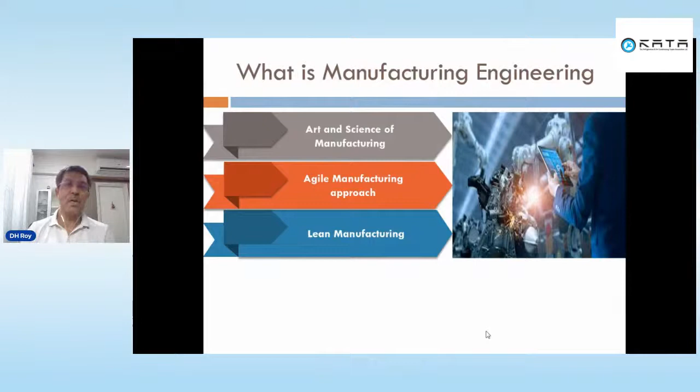And of course, lean manufacturing, as you all know, not only involves the people but also the cost at what you are able to do. Basically, how lean you are able to run a manufacturing organization to ensure cost competitiveness and obviously improve.

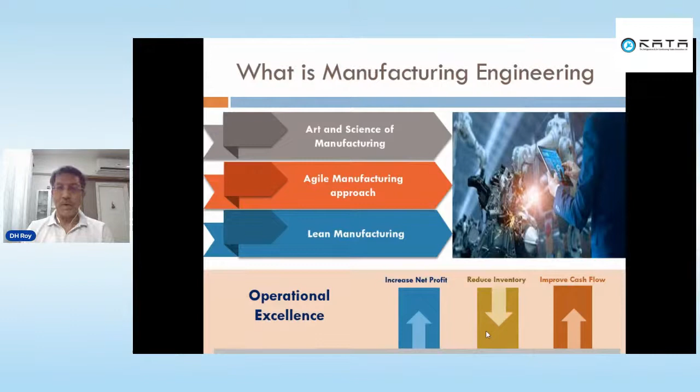So what it brings, basically, is operational excellence. And when I say operational excellence, what does it mean? If you are able to run a well-oiled machine, it increases profit, reduces inventory, and most importantly, it improves cash flow. So if your plant is well oiled and running well, these are the benefits you get. And manufacturing engineering people play a major role in ensuring you have a well run operation.

I mean, to compare, for example, though our national sport is not cricket, a lot of people talk of cricket. Now cricket is more of an individual game. If 2 or 3 people perform on a given day, probably you can win a match. But if you see a soccer or football team, it's a team game. But there's a difference between that team and what I'm talking about in manufacturing, for a simple reason that in football, though it's a team game, each individual has got a skill within himself.

And there's a single coach you have. So the person playing at the back has got certain skill, the person playing in the forward position has got certain skill, and there's a coach who takes care of it. More closer to manufacturing is what you see in the Kerala boat race. Typically they have this boat race during certain months of the period, where you'll find there'll be some 20 odd people. The boat size is something around 120 feet, with some 20-30 people rowing the boat, and there are 4 or 5 people guiding them. And it is not a one day affair.

What happens is they coach the people, they train the people, they know whose strength is there and how he will row the boat, whether he should have a longer shovel or a shorter shovel.

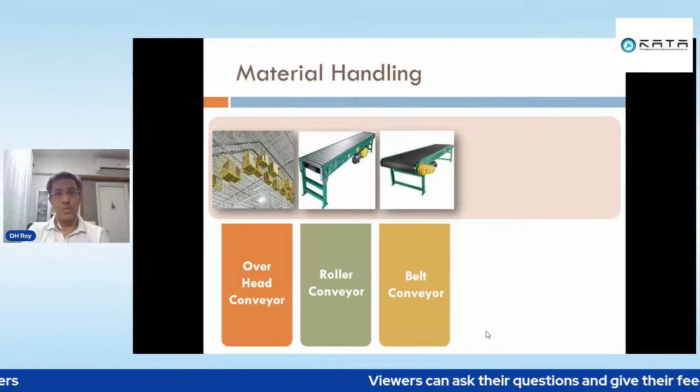So these are various types. One is overhead, where you can transfer lighter material across one end to the other, and wherever required you can take down the conveyor and take it up. Then you have the roller conveyor - it can be powered as well as gravity flow, depending again on what kind of product or component and what is the distance between the two points, you decide the roller conveyor.

Belt conveyor is generally used for light product or components, or where there are chances of damage or scratches - again you use a belt conveyor. Of course, I'm not talking about the conveyor line for making the product, but these are conveyors more for material handling. So again, the manufacturing engineering team decides what kind of conveyor you should have.

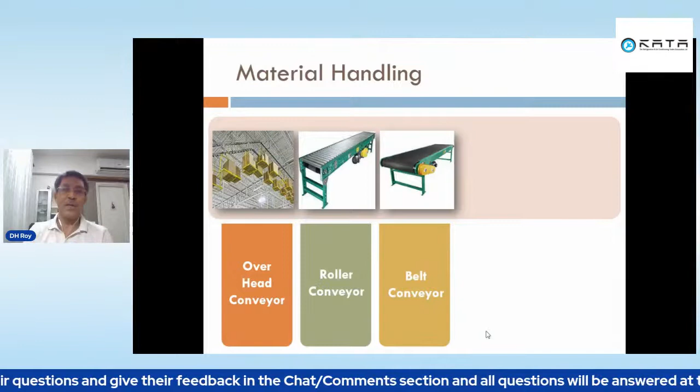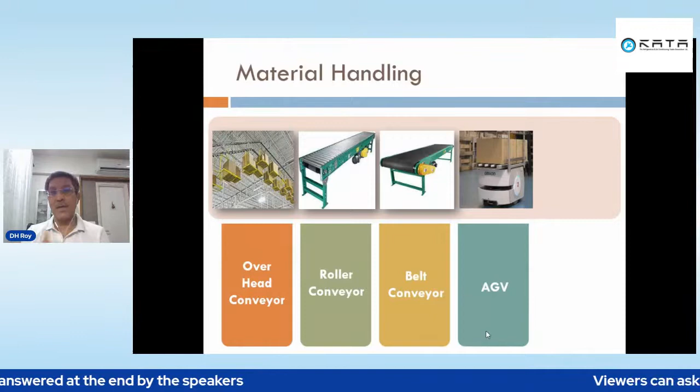Some places probably you can go for AGV, auto guided vehicle, where it is programmed and then automatically at a predefined interval, it's a kind of robo vehicle which carries your material and transfers it to the desired place where the next operation has to be done. So depending on what kind of volumes and product you have, you can use any combination of this material handling equipment, with the eye to improve output, improve throughput, and find the option which is more competitive.

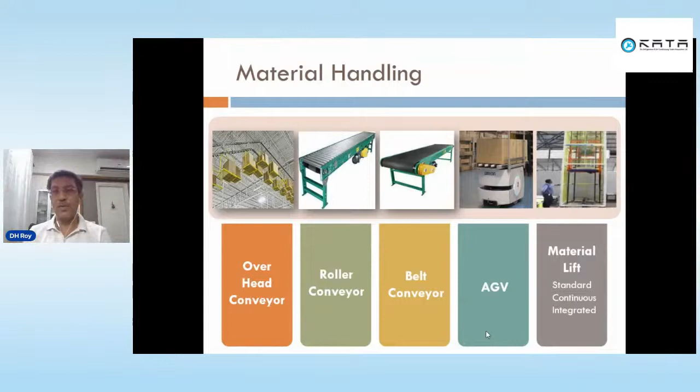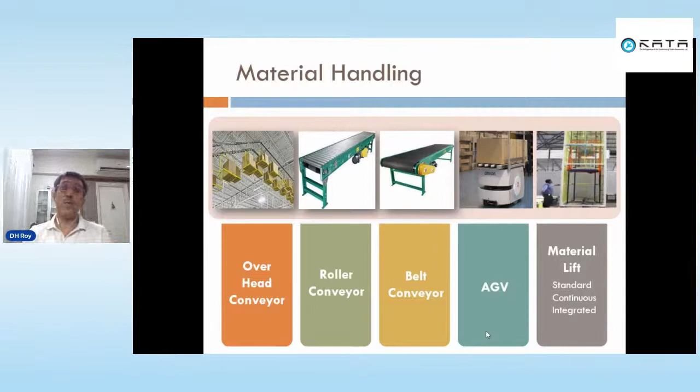So for material lift, if you are working on 2 floors, what kind of lift should you have? Should you have a standard lift, or a continuous lift where it goes up and comes down continuously, like a collapsible type lift, or do you need to integrate it so that after going up it moves to the designated point? So depending on your layout, your product, and the component you make, manufacturing engineering decides what kind of material handling equipment one should have.

This is again very important - continuous improvement. Whatever I said about it has to be continuously worked on. You should not think that once ME's work is done and set, and the design is complete, the job is finished. It's not necessary that that's the optimum solution. It is important to have continuous improvement, so the team keeps working on it.

One is, of course, the technology that is coming. Secondly, can we reduce some processes? First the process gets defined, because they take the design and drawing and set the processes. Over a period of time, they realize that probably certain processes are unnecessary - you don't need to have that process. So whether I can reduce the process - one is quality improvement, the other is reducing the number of processes, by which automatically your cost of manufacturing will come down.

Gemba Kaizen - if someone is struggling, they will go to the site and the place where the operator is working, to see why he's struggling. Though we have given an instruction, sometimes what happens is you overlook something while making the instruction or SOP, and when you actually start working on it, you realize something more has to be done, then only it will happen. Or he's already doing it, but there is scope of improvement because you got a Kaizen suggestion from someone, and then you decide how to apply it. So Gemba Kaizen is basically a Kaizen study at the site, any improvement process.

Mistake proofing - if you find there's a possibility that the operator can make a mistake in the process, what kind of jigs and fixtures should be designed so that he doesn't make any mistake while processing that product, component, or doing that assembly? Because obviously if you make a mistake, either you reject it or you rework it. So how to make it right the first time? They will design a fixture and jig so that you do not lose your productivity, do not scrap any component, or have to reject any piece.

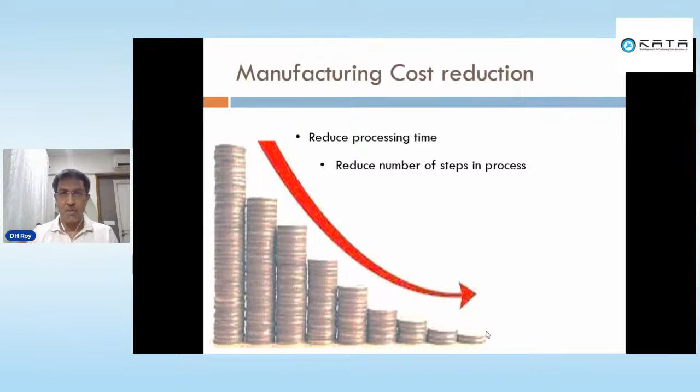As I explained, if you are doing a current product on, say, 5 steps or 5 different processes, can it be done in four steps? Certain process probably may not be really necessary, or whether I can improve upon it, which will again reduce your manufacturing cost.

Reduce rejection and scrap. If your process is well defined and well controlled, it will definitely reduce your rejection and scrap.

And more important, the changeover setup reduction. As I explained, they will work to have flexibility. How can I keep my machine running?

Because you cannot have a long production run, because if you take a long production run, you will end up having inventory. So it's better to have a short production run. But when you have a short production run, what happens? A lot of time goes in setting up for the new product or new component.

How can I reduce the changeover time, so that in 1 minute - sometimes 1 minute may not be possible - but the idea is how I can make the setup change in the shortest possible time, so that my machine uptime is more and I can run a shorter production run.

And of course, reduce WIP. If you are able to run a shorter production run, then you are able to reduce WIP, because you produce and then move to the next station. So between the 2 machines or 2 stations, there is no inventory.

It is a continuous process, and you are able to change the batch size according to the customer requirement, by which you can reduce your WIP.

Reduce the lead time. How does it reduce the lead time? Because if you have got 4 customers, that means you have to make 4 different varieties.

But if you take a long run, obviously the 3rd or 4th customer has to wait till your production run has not got over. But if you are able to reduce the production run, you will be able to satisfy more customers, and can reduce the lead time of delivery of that product or component.

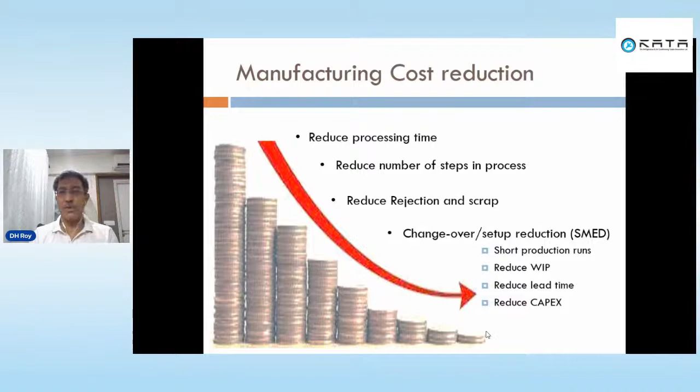And obviously it will reduce the capex, because if you are able to implement all those things - productivity improvement and throughput improvement - probably you can still achieve a higher bottom line by having the same set of machines, or by having a lower capex.

Other thing people do, if you have a more complex factory or more complex manufacturing, there are various ways by which you can monitor. Because one is, okay, what is happening, but how on a real-time basis, how to ensure that you are in control of what you are planning to do.

So there are Andon systems where visibility is provided - if a certain area gets stuck or certain support is required, people can get into it and help the operator ensure that the line is running or machines are running, or where suddenly the rejections have increased, then immediate support can go.

We need not wait for the end of the day, when the report comes next day, and then realize that so much loss has happened, and then we take action.

So now you can definitely have this electronic system by which you can have what you call 4.0, like Andon system. You can have human machine interface, and of course you can have the process sheet also displayed.

So what happens, if a particular location or station requires an operator to do 5-6 components, it's very difficult to put 5-6 process sheets. So you have a digital process, and he selects the screen or process which he is going to work on.

So it will store all the processes, and he can download and ensure that whatever he understands goes through the SOP, and ensure that he produces the component as designed by the manufacturing engineering people.

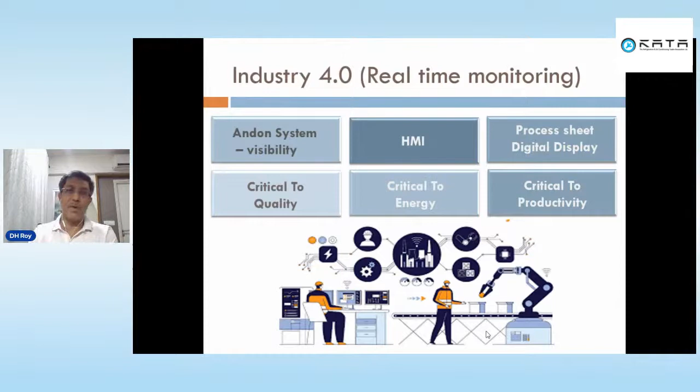This would be required more if you have a more complex process, and if you want to monitor from a remote area, then you can have this setup. A bit expensive, but definitely there's a payback for having this kind of facility.

This is just a depiction of it, basically what kind of Andon system you have. You can have the signaling system where red means there's some problem, orange means they assume there's some problem, otherwise green means it is running properly.

You can have a big board on the shop floor where on a real-time basis you know which station is producing what, whether they are producing as per the targeted plan or not. So these are the indications: if it is as per plan, it will be green; if it is slightly behind, it will be red. So you have all sorts of systems in Industry 4.0.

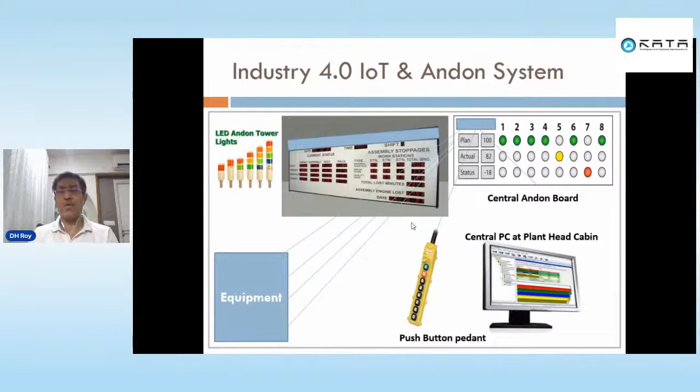But of course, these are advanced systems. If you feel that you have enough scope for this kind of thing, if your operation is more complex, you can definitely have this kind of system. I'm not getting into detail because of the limitations that we have.

Whatever I explained, there is a methodical way of going towards it. There are different phases of how you go about mapping all the processes, and not only the processes, the whole factory - what kind of capex is required, what kind of layout it should be, what kind of equipments are required, where they should be placed, what is the sequence of process, training of the operator, training of the engineers. Everything is taken care of by the manufacturing engineering department.

So phase 1 is basically manufacturing strategy. We should be clear about what we will make in-house, what we will buy from outside. According to that, what kind of equipment is required, what kind of tool fixture, what kind of machines would be required.

Phase 2 is designing of manufacturing and assembly - how the thing would be designed, whether an assembly line is to be designed, or a machine has to be put. So a complete study has to be done, and layout has to be planned.

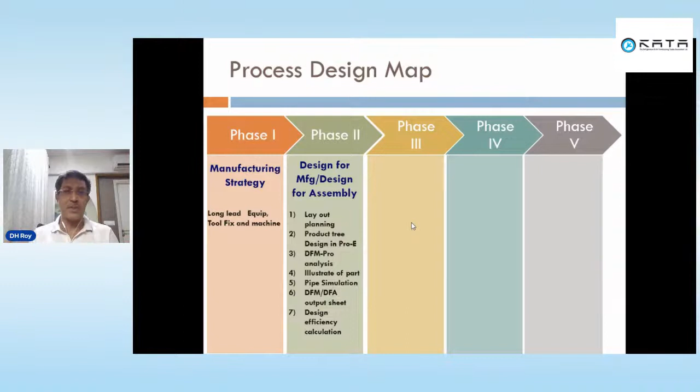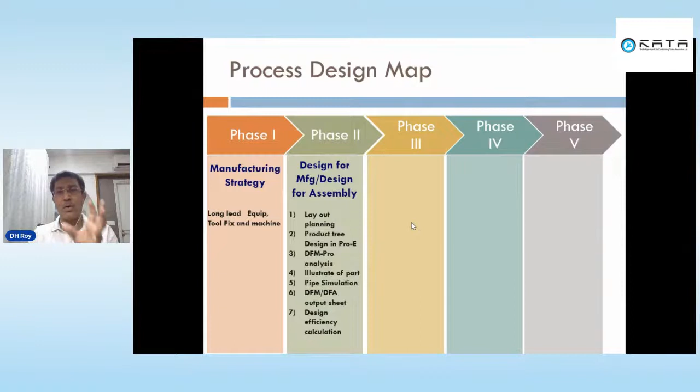First, it has to be done virtually, and a simulation you can do so that you don't go wrong. Today, a lot of software is available where even before setting up the layout, or even before buying the machine, you can do a simulation and see whether your layout and your selection of machine equipment are optimum or not.

And then you design the manufacturing process - the process flow, the sequence, the jigs and fixtures that you design, training of the operator. You will do the analysis, control plan, what kind of material handling system you should have, PFMEA you should do if required. That is the third phase.

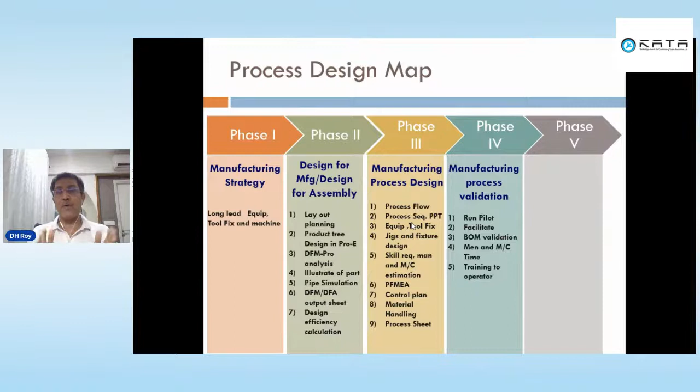Fourth phase is more of a validation, where the manufacturing people themselves will be available, standing on the shop floor and running the pilot batch to ensure that whatever they have thought of, whatever they put on the SOP or work instruction, is really working or not, and whether the training given to the operators has been understood or not. So the pilot run will be done in the presence of the manufacturing engineering people.

And finally, it will be transferred to the production people, after ensuring that now nothing can go wrong. I mean, it's actually a foolproof process - the process is controlled, the machines are right, the productivity is right, the throughput is right, the layout is right. After ensuring all of that, then it will be transferred to the manufacturing people for mass production.

So there are a lot of techniques, I'm not getting into details, there are different ways to do it. Work out what is right for a running factory. Again, there are ways to figure out where the bottleneck is, where you're losing money. There are techniques, there are methods to do it, and it depends on where you are and what you want to do.

So today I'm leaving this as more of a food for thought, but I can definitely take questions now or later. Anyone, if you have any questions, I can talk about it.

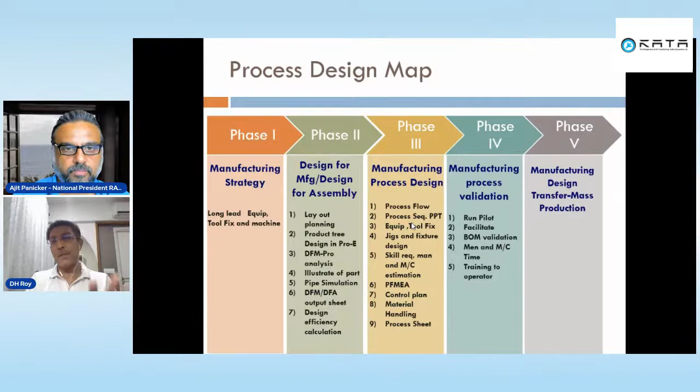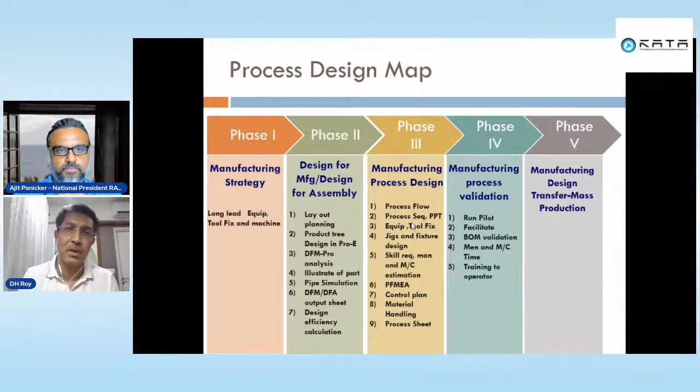It's a very interesting subject, but the key lies here - how well you have designed your shop floor, the machine, manufacturing, and thing, which will govern. This will be a differentiating factor, and which will definitely help you in improving your bottom line.

So that's it for the day from my side. Thanks, Mr. Roy. I can take the questions later, after the end of the second session, I guess.

There was one question that came up just before your Industry 4.0 slide. It was from Mr. Vasu, who said the world is moving towards Industry 4.0, and digitization is today's buzzword. He asked, please define what level of digitization should I do in manufacturing? I'm sure he's asking from an MSME perspective.

As I told you, it depends on how complex your operation is, because there's an investment involved, so you have to see what the ROI is for it. There's no limit - you can have a simple system with manual or visual control, or you can monitor in real-time from a remote location. It all depends on how much capex you can invest, because today everything is available. Machines now come with that interface built in, whereas earlier machines didn't have it, though you can always add an interface to capture data from the machine. So it all depends on how much you can invest, depending on your operation and profitability.